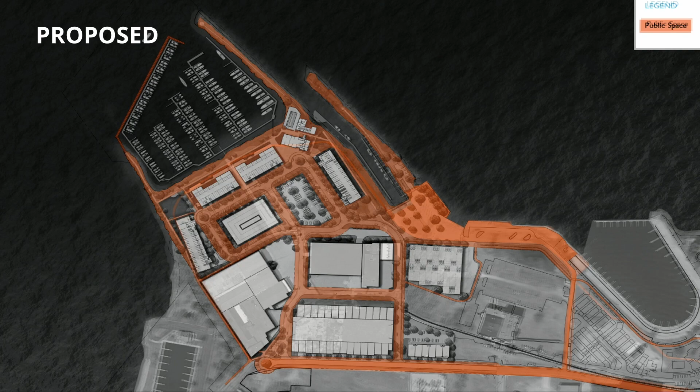So we're going to start basically 1940s industrial era, walk through historic uses up to now. What we're trying to show is historically these sites have been private, even Hartshorn Marina prior to its becoming a municipal marina. They've been private, industrial, and now they're blighted and or vacant. We want to figure out how we can generate private investment that turns a public return. That's really what we're trying to accomplish through the Development Services Division.

So we'll have four main overview points: historical uses, with several subsections; existing conditions of all three of these sites; proposed impacts to public areas, including how we're generating various tax incentives through our Brownfield to help offset public investments into these sites; changes to the existing lake access, how these private projects would impact the public access that exists today; and also impacts to the Lakeshore Trail.

Finally, we will discuss conditions post-redevelopment, so we'll take a look at what these projects will create for the public once completed and how these three sites will really interact with each other once all these projects come to fruition. So we'll start with historical uses.

This is a pretty big presentation, so it might lag a little bit. Industrial operations - historically, many of you probably know, I was born and raised here and still learned a lot while compiling this presentation. West Michigan Steel and Foundry, Anaconda Wire and Cable, and Hartshorn Spring Roller Company - as of 1940, all three of these were there and operating, a couple of them before that.

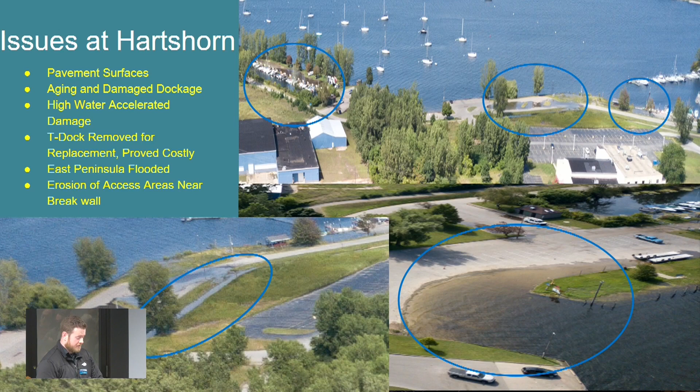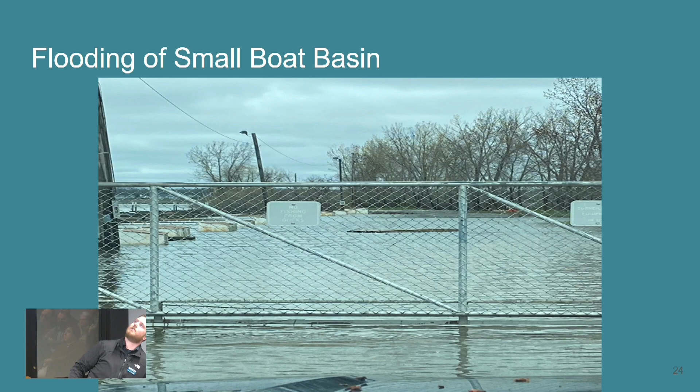And then the East Peninsula docks, actually in this picture that I'll forward to again, you can look carefully and see a piece of the dockage from one of the slips floating around in there. So it was not operational at that point.

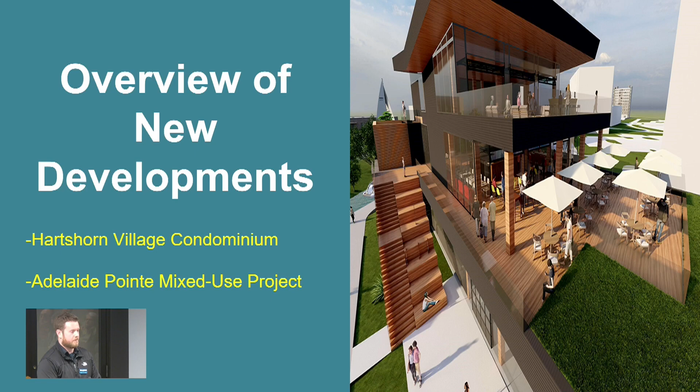So with that, we want to move into an overview of these new developments. A lot of people have heard about them through the news, MLive, social media, or maybe you've been to one or two of our public meetings. Hartshorn Village Condominium was first contemplated in 2018 and then ratified in 2019. Adelaide Pointe was first contemplated in late 2020, early 2021, and first approved at the Planning Commission level in September of 2021.

I'll quickly run through these details for those who may not be familiar. Hartshorn Village is a residential single-family condo development. The original site plan called for 55 single-family units done over 4 phases. Now it features construction of a rack boat storage facility, which was not the original intent, but it has moved in that direction over time.

One of the key features of this was the management rights to Hartshorn Marina were assignable in this agreement to the condo association, Harbor West at the time, from Public Works, who had historically managed the marina. This included relocation of the bike path closer to the lakefront, elimination and rerouting of the driveway that went to the boat launch from the Hartshorn Marina office, and elevation of the bike path in that wetland area we showed on previous slides that was badly flooded, to avoid disturbing the wetlands.

And then construction of a new marina office, community building, and pool in the final phase. So I'm going to walk quickly through these site plans. I put this in red right here - this is not the current site plan. I want to make sure everyone understands this is the original one approved in 2019 by the Planning Commission and City Commission, the original planned unit development, or PUD.

PUDs are for larger parcels of property, so you see a lot of industrial redevelopment done as a PUD. If it's not going to have another big industrial building on it, it's going to be pieced up into different phases and components. Very common planning tool for large parcels that need redevelopment. PUD stands for Planned Unit Development.

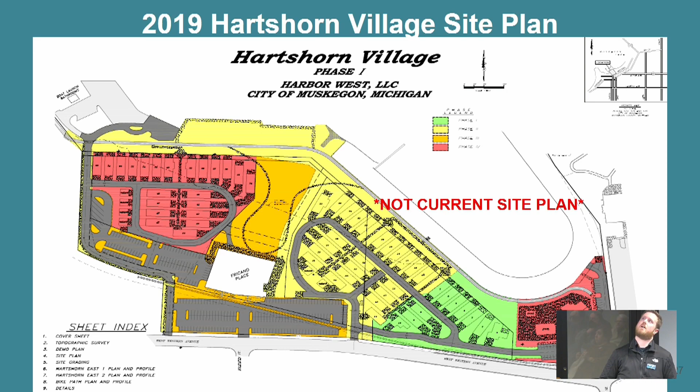In March of 2022, we heard from the developer at the time, Smith Equities and DeHaan Home Builders, who came back with a wetland delineation study illustrating that because of high water, the wetland area in that middle section behind Fricano's was far more extensive than originally contemplated in their site plan. So instead of building multiple single-family condos that would have required mitigation of that wetland impact, they contemplated building a 16-unit single or multi-family condo building instead.

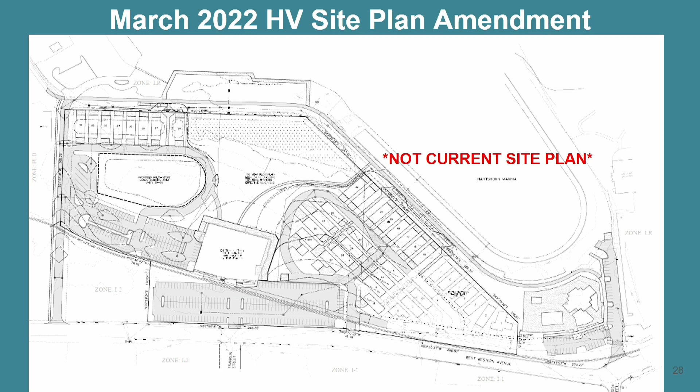So condensing it, taking up less of that wetland space, and leaving those wetlands untouched there in the middle - that was the main change in this amendment. We also have a specific table set up for these various developments and their site plans in the back, so after the presentation our planning director will be out there to take any questions.

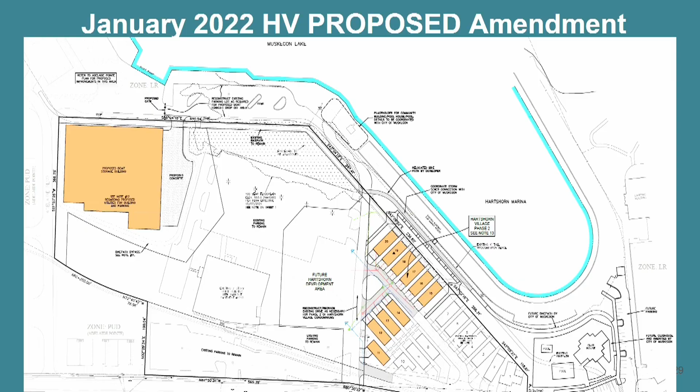So moving on quickly to Adelaide Pointe. Adelaide Pointe is 300 plus housing unit multifamily condos over multiple phases.

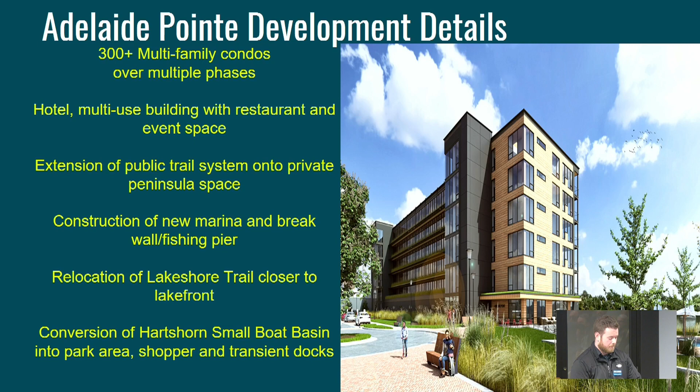It also features a potential site plan for a hotel, multi-use building that would include restaurant and event space, extension of the public trail system onto the private peninsulas there, construction of new marinas, a breakwall and fishing pier that's accessible to the public, relocation of the Lakeshore Trail closer to the waterfront from where it sits today, more pedestrian crossings than it has today, and conversion of the Hartshorn small boat basin into a park area, plus shopper and transient docks.

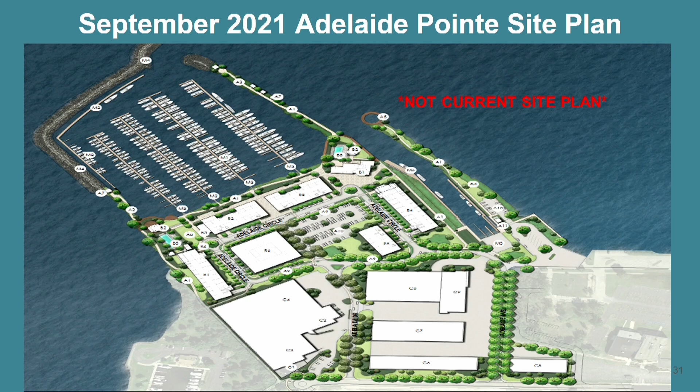So this is the original rendered site plan from September of 2021. As you can see, it features a lot of the items that I just listed. One of the biggest changes going from this one, you'll notice these get a lot more engineering looking.

So the first change that was contemplated was in June of last year, mostly to include changes to the road structure. For traffic calming purposes, they wanted to install an additional public street here and make the loop one-way with angled parking as opposed to two-way with parallel parking. Instead of having one restaurant building up in the top corner, they would have a restaurant and event building and an additional boater services building for the marina, instead of having all those services in one site. Those are the main changes from the original to the June 2022 amendment.

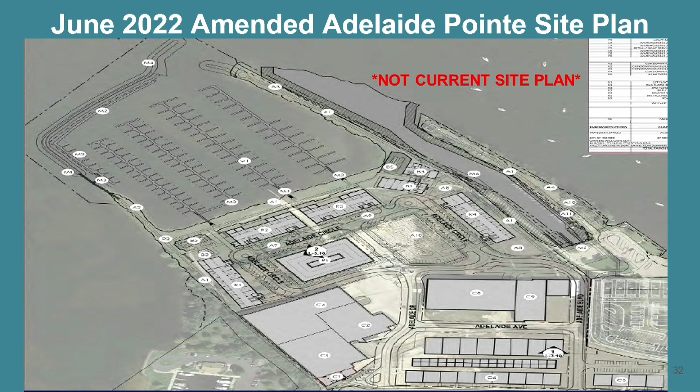So in January of 2023, this is the proposed site plan that also goes to the City Commission. On February 14th, it was passed by the Planning Commission. The biggest change you'll notice between these two is that the marina is roughly 100 slips smaller and does not use a limestone pile breakwall, but uses a wood and sheet pile breakwall, which is publicly accessible and includes that fishing pier as referenced, but it is a smaller marina.

This owner acquired last year the Hartshorn Village development, so these are now both owned by one owner through two separate ownership entities. The reason that these are so interconnected is because they are next door to each other, and now they're owned by the same person, but they are still separate developments from a planning standpoint. I want to make sure I clarify that.

So this marina has shrunk quite a bit, and I think the other biggest change is this originally was multiple smaller commercial buildings. It's now contemplated to be one larger commercial building.

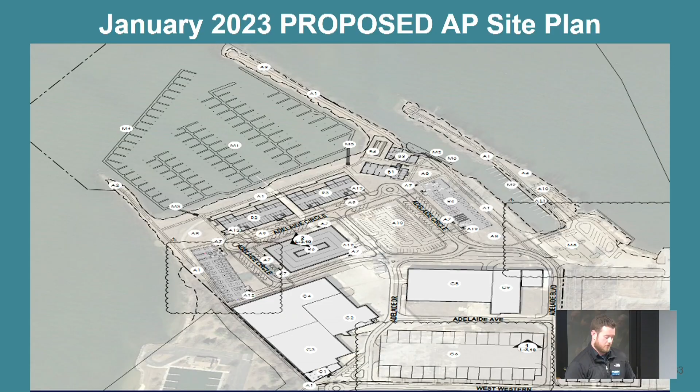So as we move through that, we want to look at the overview of our existing public amenities. What are people enjoying at Hartshorn Marina right now? What are people mostly using the park for? Want to run through that: fishing and leisure, and our Lakeshore Trail as well.

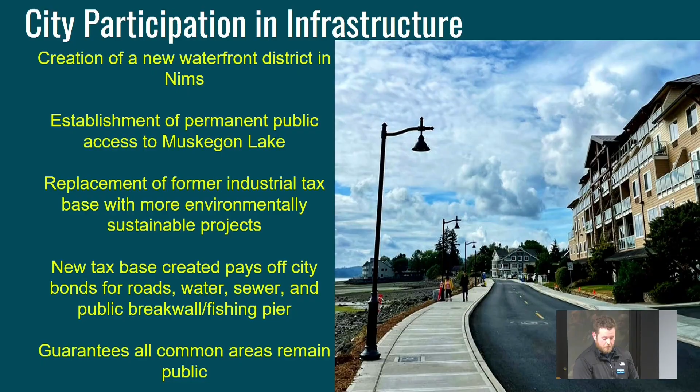Just to be clear so everybody understands, effectively at Hartshorn Village, you may have already noticed there's a road and water and utilities there for this neighborhood. And so the city has reimbursed those developers and is now the beneficiary of that brownfield TIF. So as the taxes come in from these properties, we collect that to pay ourselves back for those utilities.

We contemplate doing the same thing here. So the city would bond up front for roads, water, sewer, and then that break wall, in exchange for construction of the first phase of assets here, which would generate tax capture, which would pay the bond payment and the developer's eligible activities on their side of the development.

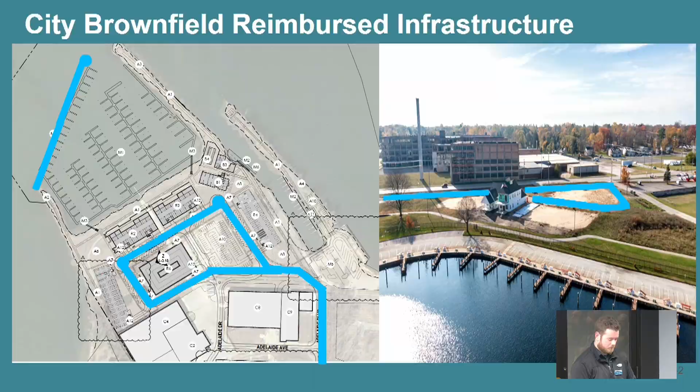And again, that's Adelaide Pointe and Hartshorn Village, now both owned by Ryan and Emily Leestema, with Leestema Management as the managing entity. So, changes to existing lake access. I want to go over forklift drops, trailer parking, and the gravel drive, and how these things that exist today could change in the event these things move forward.

I'm not going to read this verbatim, but it's commercial use of forklift drops. Currently there's boats stored at the Adelaide Pointe site in those buildings that have been stored there approximately since 2005. There's been seasonal and active storage there.

The site plan amendment passed the Planning Commission with conditions. A stormwater permit has to be issued by the City Engineering Department first. Ten-inch concrete has to be installed anywhere the forklift operates—that's noted on their updated submission. The bike path has to be elevated near the wetlands, pursuant to the original submission, but we wanted that specifically stated.

Future community building and pool location to be removed, because there was some contemplation on the PUD to maybe in the future move that community building at Hartshorn to a waterfront location, but it's up in the air, so we didn't want to put it on the plan if we're not certain that could take place.

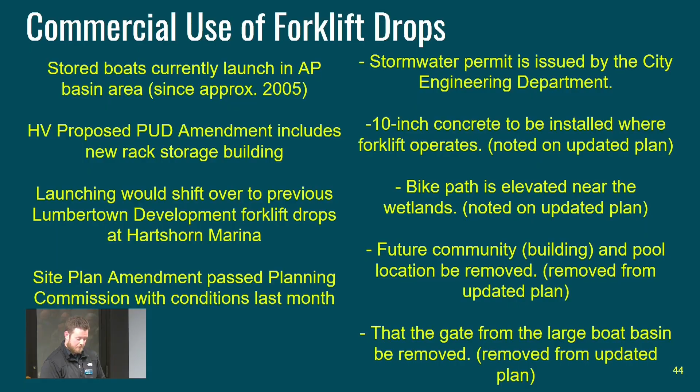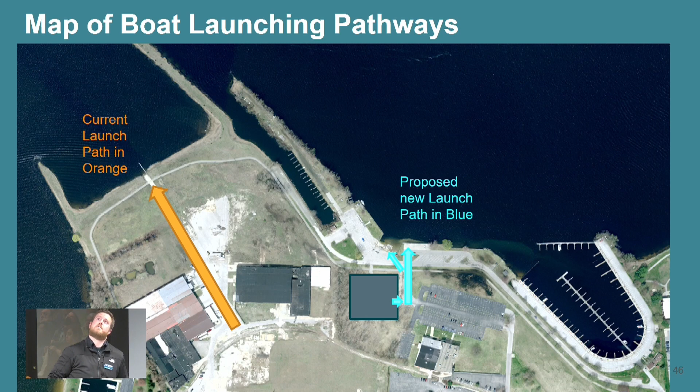So just to reiterate, the current launch path where people are launching boats right now is in orange and comes from these existing buildings in this existing site. Those operations would move over here, and they would come across through the Hartshorn Marina to the existing forklift drops that were used by the Lumbertown development and utilize that methodology instead. So proposed new launch in blue and current launch in orange.

So we get into reduction in trailer parking and increase in car parking. This is one thing that's confusing for the public to get a handle on, because this is actually in two different site plans since they were originally two different developments with two different owners. So there's a net reduction in trailer parking proposed as of now with the two site plans. We go from 34 boat trailer parking spots over 2 parking areas to 21, still over 2 parking areas.

However, we go from 7 park-oriented passenger car intended parking spots, which are directly across from the bathrooms in the small boat basin, to 83 total spots between 2 parking lots, one on the small boat basin peninsula, and one which is a retooling of the existing parking lot right now. The existing parking lot has a large curved apron with a green space in the middle, intended for trailers to drive around and loop, designed to keep them from hitting folks. But the way it's redesigned, they won't go over there. So it's a drastic increase in car parking, and there is a decrease in trailer parking as well.

And then the other big change I want to highlight that's proposed by these PUD site plans is there's currently a gravel drive that people utilize right now to go down and fish in the small boat basin, which the boaters didn't love when there was a basin there, but that was a constant complaint point. That gravel drive is currently parallel to the trail and the small boat basin and runs in between them.

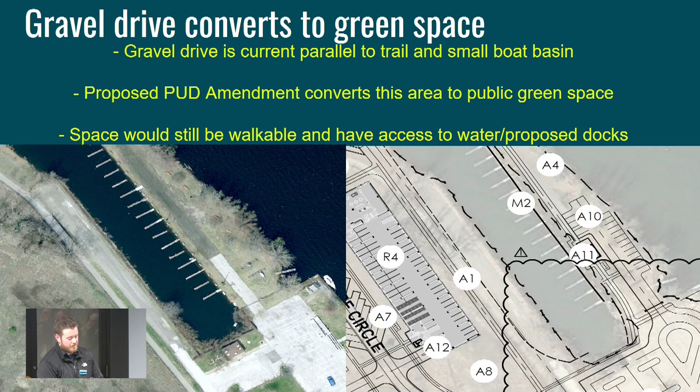So impacts to the Lakeshore Trail, and I'm running a little over, but I want to make sure we get through this. This is important content for people to understand. Hartshorn Village Trail would contemplate moving the Lakeshore Trail. Adelaide Pointe would contemplate moving the Lakeshore Trail. Then finally, I want to briefly discuss the railroad easement that the city is in the process of acquiring.

As I mentioned, the original plan at Hartshorn moved the bike trail already. It moved it closer to the large boat basin and eliminated a driveway, which is now accessed over at the Fricano's parking lot to get into that marina. At the end of both of these projects, there will be a shared road between the two of them to the left of Fricano's that would actually access the marina. So that road was eliminated, which moved the bike path closer to the marina.

The trail plan for the Hartshorn PUD amendment right now includes a bypass. It does not eliminate any further trail, but in purple here you can see that driveway next to that orange building is where people would be coming out with a fork truck to cross the boat, and they would have somebody actively managing any bike, pedestrian, or vehicle traffic in the driveway. But if people didn't want to wait, if I'm there with my kids in a stroller or if I'm on a bike and I don't want to wait, the plan calls for a bypass to go around the building and continue on my way.

And then finally, as I mentioned, the conditions the Planning Commission approved in that amendment require raising the trail in the wetland area to stop the problem of flooding, per the original plan description. That's actually a picture I took in April 2020. That is the bike path. That's a regulation road cone right there. And that's a swan that built a nest on the bike trail. She was there all summer, hanging out, having a good time.

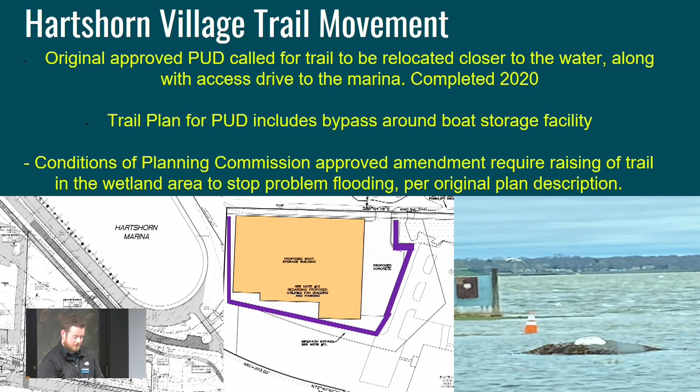So to avoid these types of issues and get folks access to that trail again, there are some changes that need to be made from an engineering standpoint.

Adelaide Pointe also contemplates moving the Lakeshore Trail. It would be relocated closer to the water along the Adelaide Pointe Marina. I'd encourage you to take a close look at these in the site plan table—it's hard for me to convey on these screens.

Originally there were 4 crossings for pedestrians contemplated in this plan. That's been reduced, at the request of staff and the Planning Commission, to 2, just to make sure there aren't multiple crossings when there's bikes, strollers, and people trying to get to their boats. So there'd be 2 crossings.

It would move closer to the waterfront, and the trail will tie into new non-motorized pathway systems that go down both peninsulas and eventually out to the break wall. The trail would also give access to public areas of Adelaide Pointe's development, such as the plaza in front of the multi-use building.

Last but not least, we have the city railroad easement acquisition. The city has been working for a couple of years toward acquiring this former CSX line easement, which is just a dead railroad spur. It used to go all the way through to Sappi. It no longer does, and there's no use of it, so we're trying to acquire that.

There are conditions to acquiring that easement—there can't be anything built on it or over it. So what we'd like to do is work with the lessees to put what we'd call a bypass for the lakefront side. Basically people would have 2 options, and it would also create a trail loop where if people wanted to walk laps, they could stay in the entire Hartshorn lower western area and do laps on this site, with an additional non-motorized path reconnecting at the Boys and Girls Club.

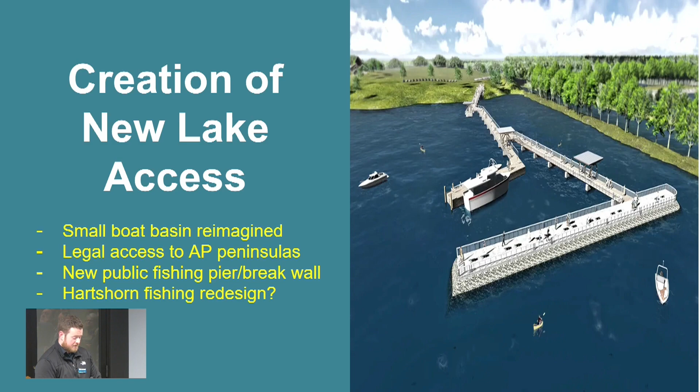So the small boat basin turns into a peninsula park. One thing that's historically been accurate is that this has been gated all the time to anybody who doesn't have a slip in that basin.

There were 31 slips, I believe—I'm looking at a couple people I know had slips in there, but I think there were 31. Those were the people who could access that, them and their guests. There's a bathroom here that was keyed and locked, and if you weren't a marina user, you couldn't use that bathroom.

So all that fencing and stuff would go away, and we would develop new park space, including new public parking for the park, a picnic area, a walkway. There are some wetlands out here we don't want to bother, so we'd do a boardwalk walkway and then some waterfront access at the end.

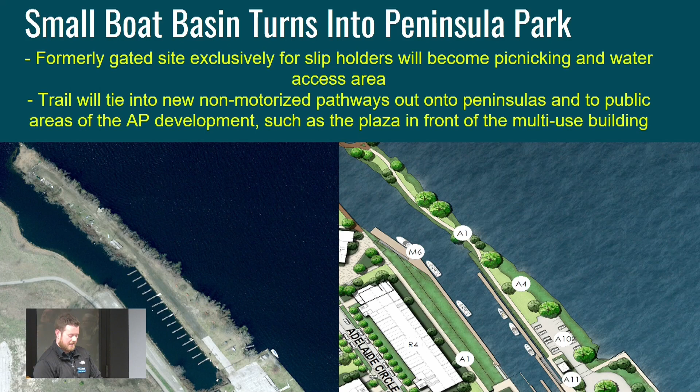At Adelaide Pointe, this site would host 2 peninsula parks. There's an existing cooperative use agreement passed between Adelaide Pointe and the City of Muskegon City Commission that allows non-exclusive use of assets in the Hartshorn Marina's boat launch and forklift well area and small boat basin area, in exchange for easements from the bike trail to the entirety of these basins.

So these basins would also have new peninsular parks installed that would then, on the westernmost side, connect to the breakwall and fishing pier. I do want to note that's not the most recent site plan—the marina is way smaller than that now, but I didn't have a rendering of that breakwall.

Speaking of, there would be a new public breakwall and fishing pier contemplated, and the DNR has appropriated $1 million toward the fishing pier portion of that asset. They're working toward an EGLE permit for this marina that would include portions of this, which should be announced very soon. The city will hold irrevocable public access to this amenity with dedicated easements from the Lakeshore Trail.

One thing I want to make sure is on everybody's radar who's interested in public access and our park system here in Muskegon: the public's been accessing this area for fishing for years, but it isn't designed for fishing and isn't contemplated with those people in mind. There's several locations in the park where we think we could do a lot better, with great ADA accessible fishing amenities we could implement.